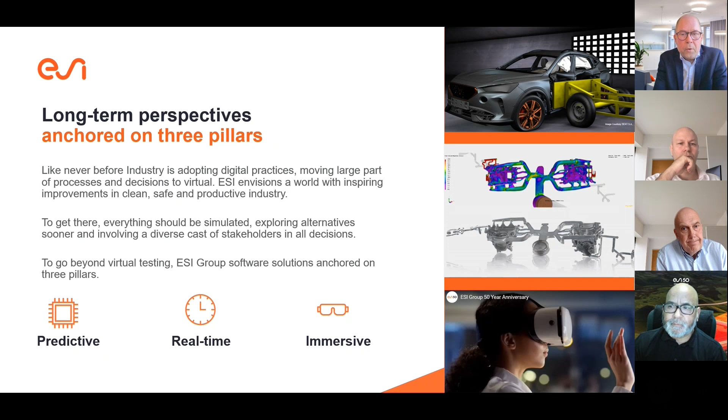And we are also engaged in smart manufacturing. So what you see here also on the picture is casting simulation, where we, for example, are working on mega casting projects in the automotive industry. So supporting product performance, smart manufacturing, and what we will talk today about, human, product and process-centric validations, is key for us. Next slide, Eric.

And also to connect a little bit to why we are here today. Together with PTC, we are supporting Volvo Trucks. And we will also be present at LiveWorx to talk about this a little bit more. But this is an example how we are together enabling Volvo to actually experience the virtual data in a much better way and doing global collaboration to reach a clean, safe, and productive environment.

So with that, I hand over to Eric, and myself, Jonas Fredriksson, I'm running the EMEA customer engagement organization. All right, thank you for that lead in and that introduction, Jonas. As Jonas said, my name is Eric Kam, and I am a product marketing manager for ESI Group, for what we call our human-centric process validation tool.

And that brings us to today's topic of unpacking or decompiling what I mean when I'm saying human-centric assembly. And what does it mean to weave a digital thread through that validation of human-centric assembly processes?

And really what we want to do is we want to provide people with the necessary tools and the necessary insights that they need so they can have certainty that any new product that they are bringing to market, that they're in the middle of engineering, that you are kicking off its product life cycle, you want to have some certainty that people can safely and efficiently use those products, operate them, that they can build them, that they can assemble them, and that they're able to service and maintain those novel products.

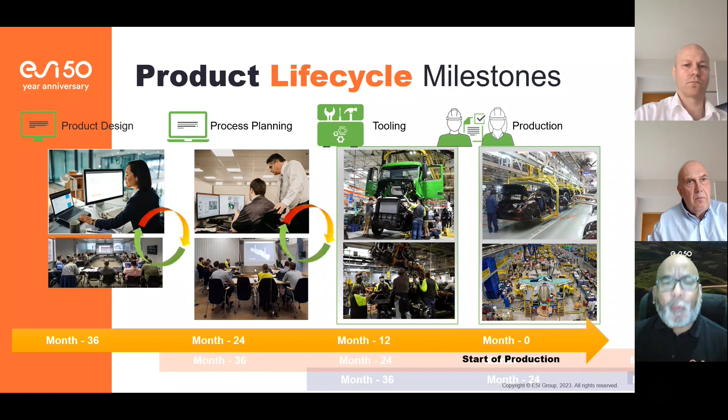And one of the challenges that we've seen and what we're trying to help you guys out in industry address is to partner with companies like PTC so that we can help you stitch back together and reweave any of those potential breaks in your digital thread.

Now, to further elaborate on why that sometimes happens, let's first consider, when do we identify these issues? How do we identify them? And when is the earliest opportunity, once we find them, that we can resolve them or fix them? So again, I'm representing that timeline going across this chart on the left-hand side of the slide from left to right. We're in engineering, and every engineering program, hopefully, kicks off with a list of, this is what we found and this is what we learned the last time we engineered this part. Let's make sure we avoid those issues again.

So they'll start off every engineering program with a list of frequently challenged issues, frequent problems that they had, and they'll try to resolve those as part of their due diligence of doing their product engineering. Hopefully, before they release that product design for process planning, they've resolved a majority of those issues and reached a steady state of, let's call it, no visible or no unanticipated issues.

Then, as they start doing process planning, and maybe they're using computer simulation, maybe they're using their digital mock-up tools, new risks emerge. And again, part of that whole process of doing the tooling planning and the manufacturing planning is finding issues and then resolving them through design. And then at some point we reach data freeze, we froze the data and we start standing those tools up physically. And then we start encountering more risks or issues that we found.

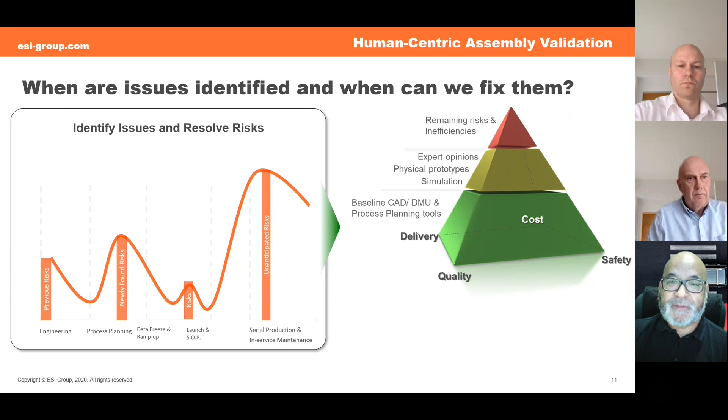And so quite often the first time that people can start interacting with a product and participating with it in a process is once those tools are physically available in the assembly line or in the manufacturing environment. And that means we've left a lot of remaining risk unanticipated, unaddressed and unmitigated until quite late in that process. When we talk about human-centric process validation, what we're talking about is trying to create new opportunities so that humans can experience that product in the context of those human performed operations.

So in the lower right-hand part of the screen, you can see an image of two people in virtual reality doing an ergonomics review of the installation of a plug-in electric hybrid. That happens to be a Volkswagen Passat plug-in electric hybrid. And this team of manufacturing personnel, represented by those ergonomics mannequins, is trying to validate the placement of that battery. And by doing this in VR, they could quite possibly be performing this check much, much earlier than we normally would have people experience those physical processes.

By introducing the use of virtual reality or extended reality technology, we're providing the opportunity for people to effectively travel in time and teleport themselves into that production environment, a manufacturing line that has yet to even be commissioned. And they can start identifying and resolving those human factors or human-centric issues in their designs. That way, we can really participate in the manufacturing processes before we finalize the product data and release it for process planning.

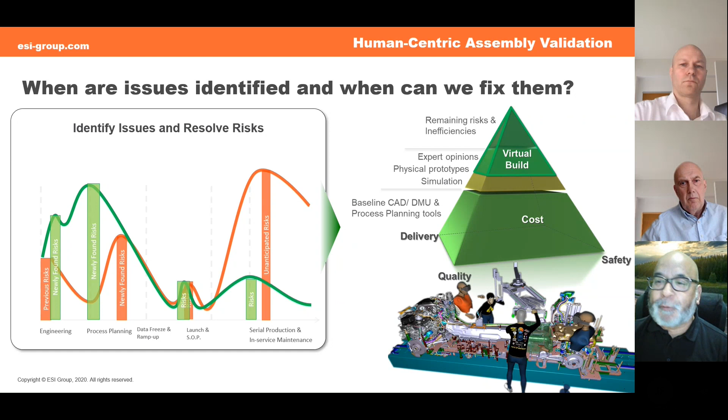We can identify how people will participate in and experience that manufacturing process before we finalize it and realize it in hard tooling. And that's going to allow us to use this virtual build, this virtual reality human-centric process validation, to really address that normally unaddressed risk that we would have to wait until serial production to arrive at. So that's what we mean when we say human-centric process validation.

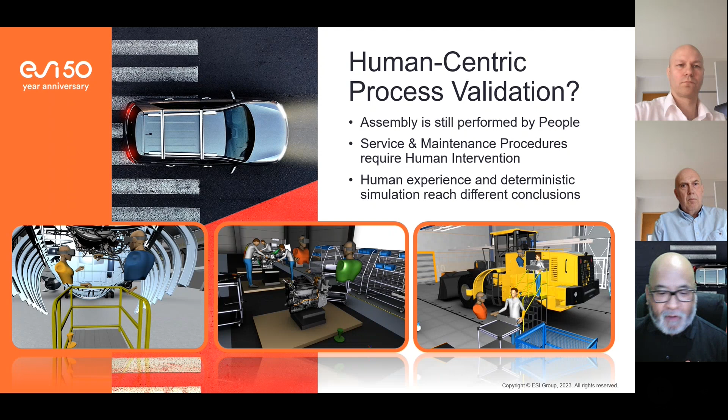Regardless of which technology we're talking about, there's still a ton of manufacturing operations and assembly that is still performed by people. Also, don't forget service and maintenance processes also require human intervention. The experience an individual has while performing any one of these operations on screen, whether it's me servicing an APU of a fixed-wing commercial aircraft, doing a subassembly of a plug-in hybrid power plant for an upcoming vehicle program, or placing batteries in the back of an electric wheel loader, leads to very different conclusions than what we could normally determine with deterministic simulation or some kind of simulated animation of a manufacturing process.

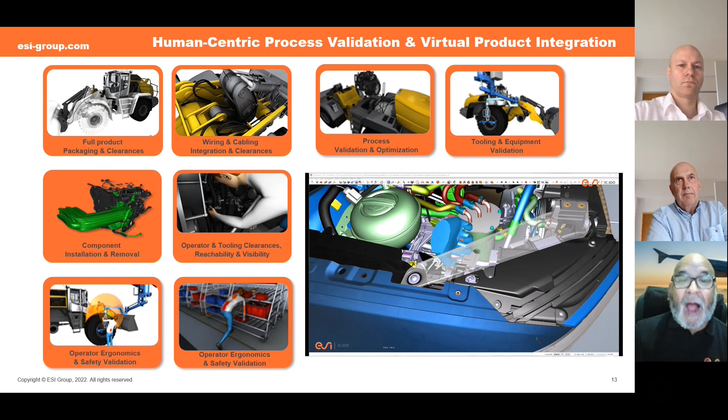And in that little animated sequence, if I did find that the cable was too short, then in the simulation I could also engineer a longer cable and validate if that cable works. Now what's happening on screen is I'm seeing, does the operator have the necessary clearance to grab that cable and unplug it if it's already plugged in?

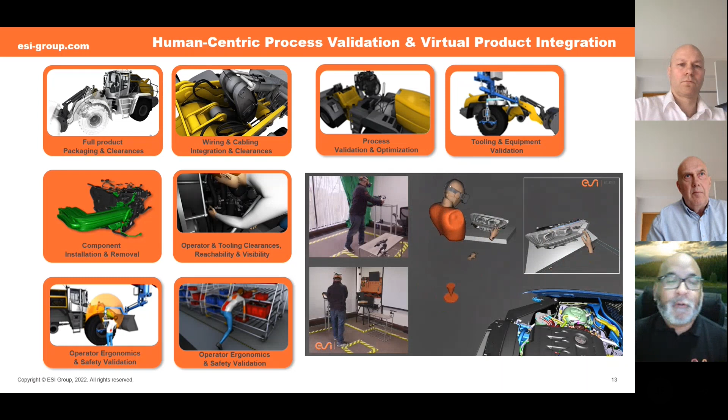Another thing that we might want to validate is using this virtual reality to validate how humans participate in assembly. On screen right now is a colleague of mine, Meredith, and she's holding in her hand a physical headlamp from the previous model year. And we have that headlamp mounted with a virtual reality tracker, one of those things that we can get from Steam to accessorize my Vive or my Valve Index. And in this case, I'm doing a tracked simulation of me holding a physical headlamp so that I have a real weight in my hand and trying to mount that.

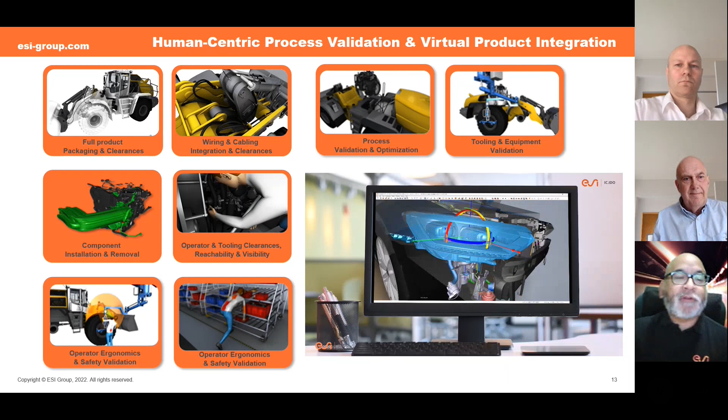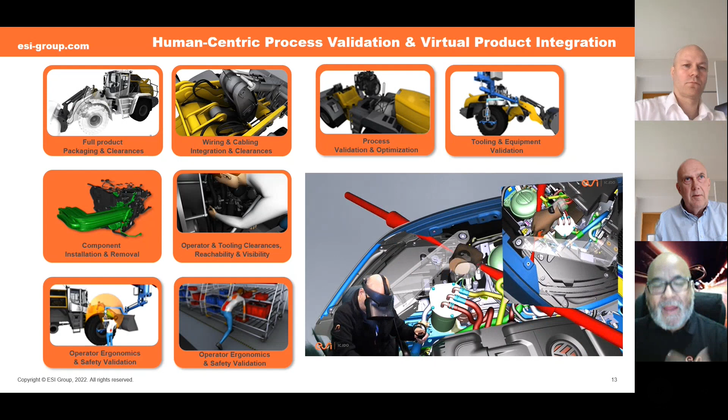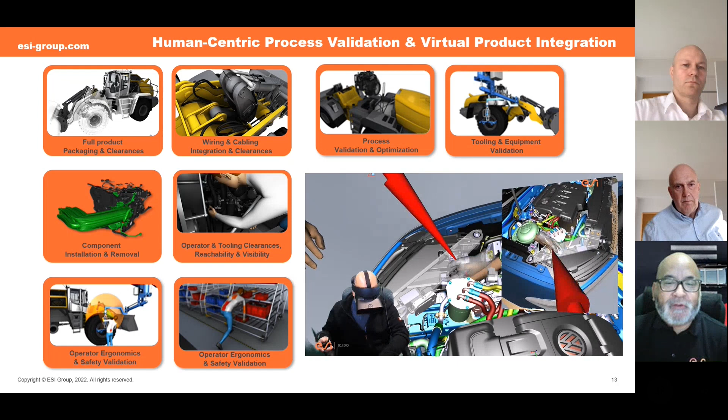So what we're able to do when we do this human-centric process validation is we provide for people an environment where they can validate things like product packaging and clearances, but in a much more dynamic and a much more immersive way than we would normally do if we were just using digital mock-ups and doing on-screen puppet shows. And so by making me involved or immersed in that operation of mounting the headlight, of trying to plug in that headlight, I am now an input. Me, the human being, is an input into that simulation and the decisions that I make as a result.

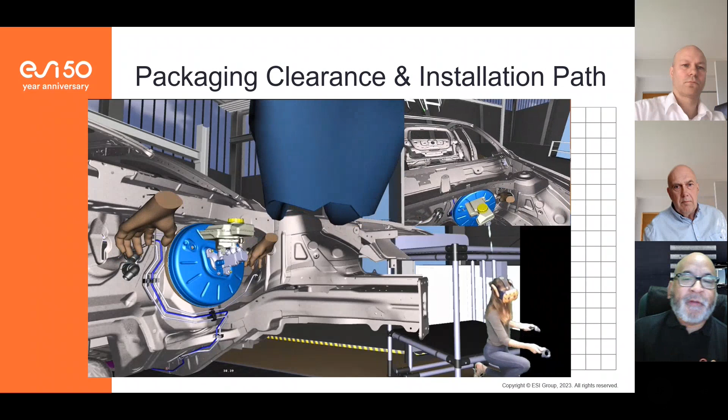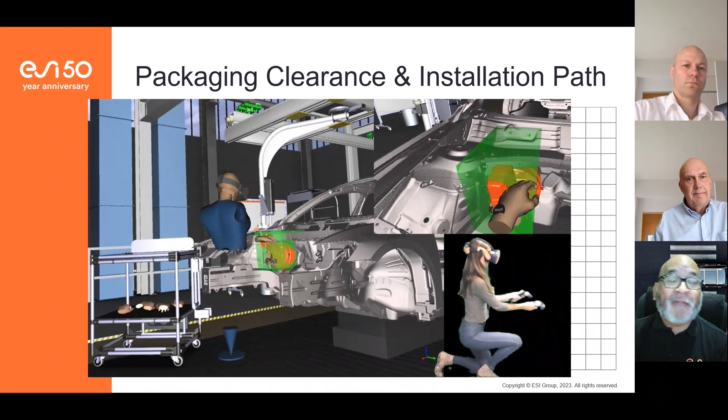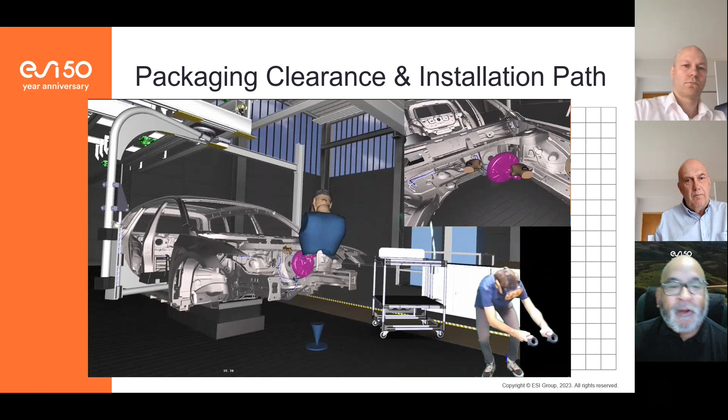So again, on screen, we just have another view, just a different part of that same vehicle that we had on screen just a moment ago. In this case, I have a variant. I have a left-hand drive and a right-hand drive variant of the same vehicle. And on screen right now, I just have a team of different stakeholders from my enterprise who are all taking turns just making sure how difficult is it to mount. That's the power brake booster for power brakes in the car. And I'm just making sure that if I'm mounting that in the left-hand drive vehicle, will it mount just as easily in the right-hand drive?

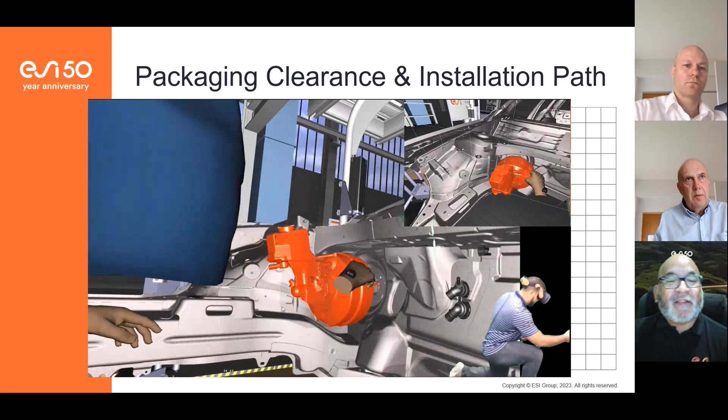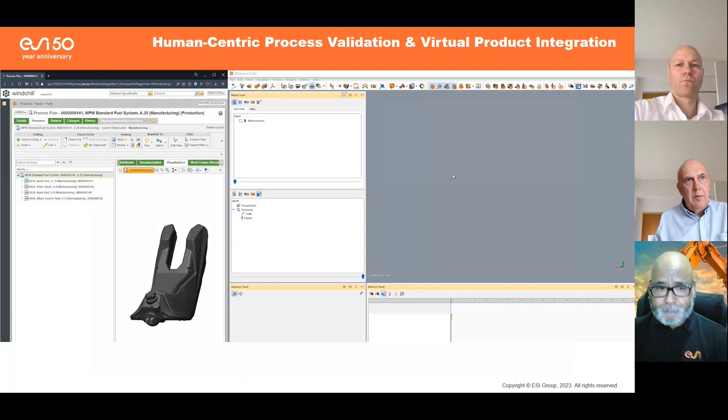And we did make many discoveries that it is more difficult to assemble the right-hand drive car in regards to this brake booster. And it would increase that manufacturing lead time and slow down the takt time. So whenever we use these virtual reality experiences to validate manufacturing processes, some of you might ask, well, how did we capture that data, right? Where did that product data come from?

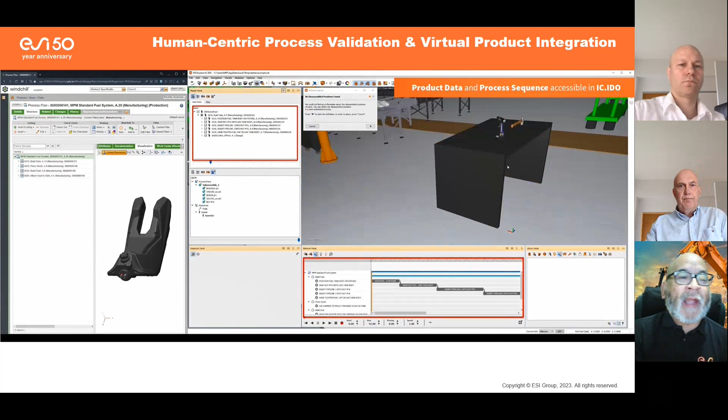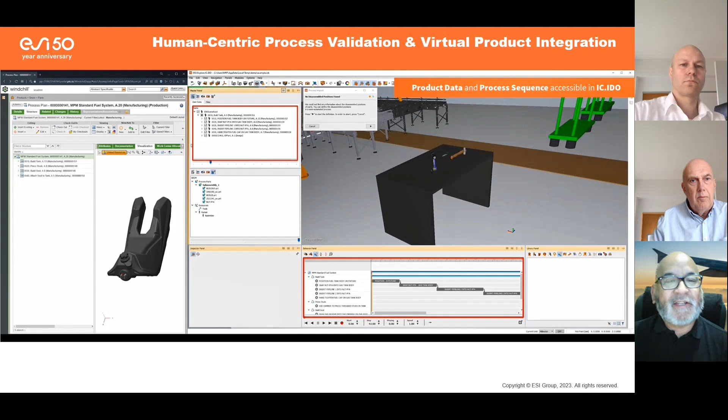So what's happening on screen right now is the outcome of a couple of years of collaboration between ESI Group and PTC to integrate the Windchill PLM and MPM environment and integrate a data path into IC.IDO. So first of all, I'm going to back the video up just a little bit to go right back to the beginning, because this is important. Here we're taking product data that we've highlighted in the Windchill environment, and we pushed that data into IC.IDO. And in doing so, I have effectively traveled almost a year or maybe 2 years forward in time to when that geometry of the product and the manufacturing environment would in fact be realized in the physical world.

And on screen right now, I'm just taking that digital representation of the production process, and I'm just mapping that to overlay with what I know the physical environment of that plant's going to look like. You can see on the bottom of the screen, we have that little Gantt chart going across showing the process order or the procedural timeline. And we're trying to capture, is this an appropriate way to transfer that part from its staging area where it arrives from logistics to how it goes on the line?

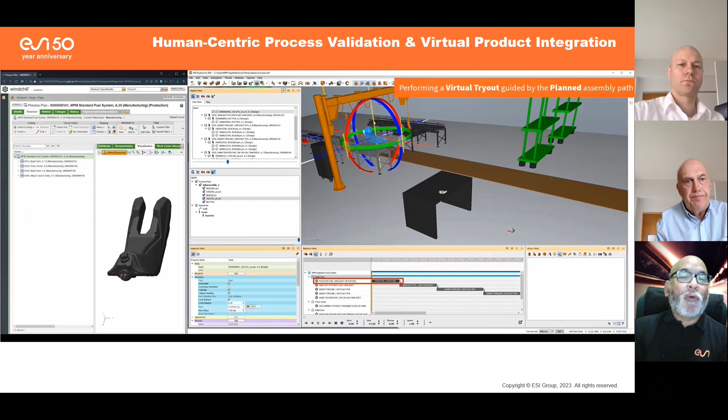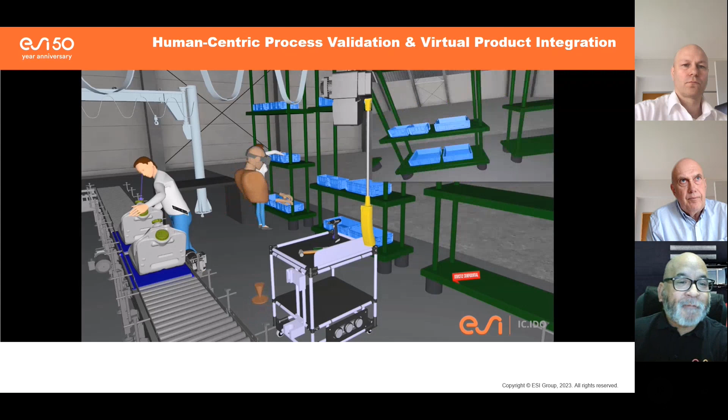And maybe in this case, we know it in fact is not going to just travel in a straight line, but it's going to march 90 degrees perpendicular to that production line and then walk along that production line for some distance. And now that we've seen that on-screen puppeteering of validation, is that a reasonable process? Now one of my colleagues was able to put on his head-mounted display, or his HMD as we call it, and enter into that manufacturing environment and experience it for themselves. And so on screen you'll see a little grayscale version of one of those components kind of flying across the manufacturing environment.

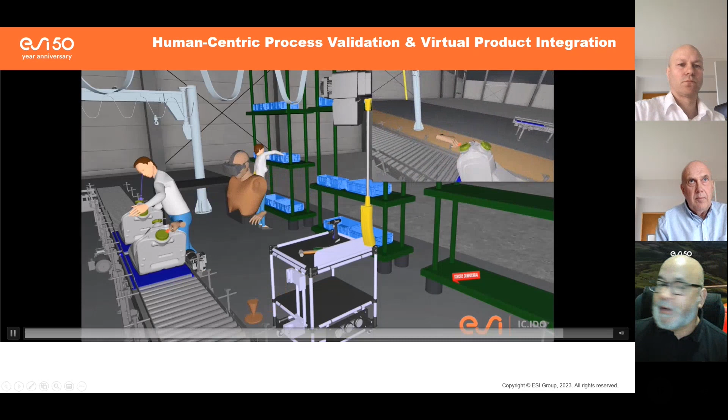And then my colleague walks over there after seeing that teleport from one point to the other, and then he goes over and picks up the actual part, has to physically, virtually carry it in his hands, and walks over to the line and mounts it to the rest of that subassembly.

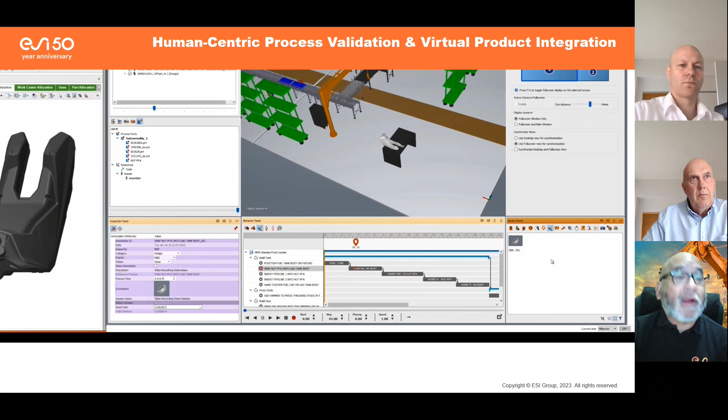And in doing so, he might recognize that the process was well planned or well defined or not. So if he did observe something that would require an engineering change, he's now added a process annotation, and he's quickly typing in on the screen. Don't worry about it, this is not an eye test, but we're capturing relevant data about what we saw in, let's call it, a manufacturing validation of that mock-up of the assembly line. But what's important now is that he's captured that data digitally.

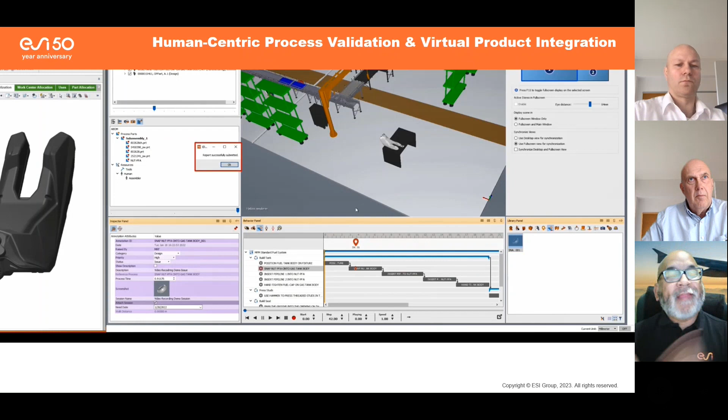And now that it's captured, we can submit that as a report, and that becomes part of the digital thread that gets transferred back into your Windchill PLM and MPM environment. And that way, we can reconnect what I said was that slight severing of the digital thread that often happens when we go from process planning to tooling realization.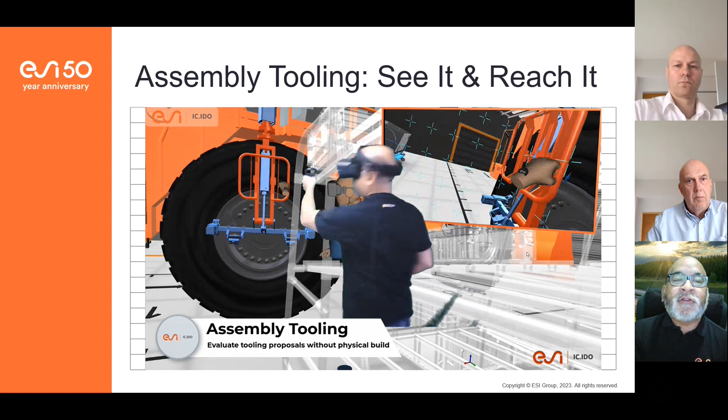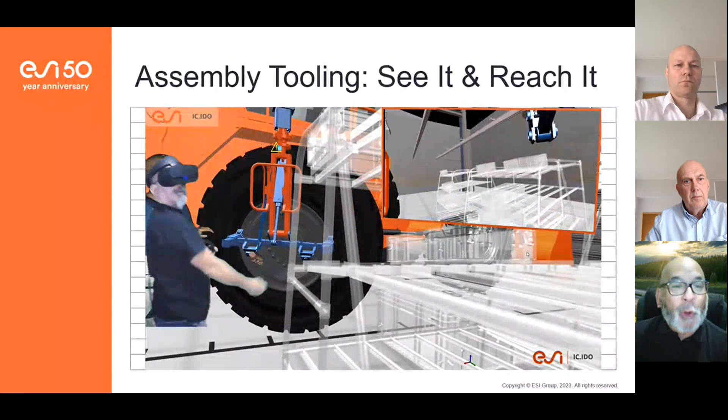So there's quite a range of things that we can do in this virtual environment to provide you with opportunities to do things like validate this tooling. So in this case, I have an assist tool that's helping me pick up and lower a big tire for a large earth mover, a large wheel loader.

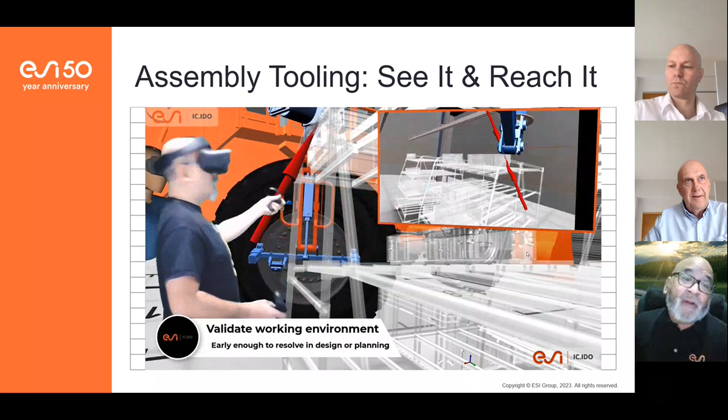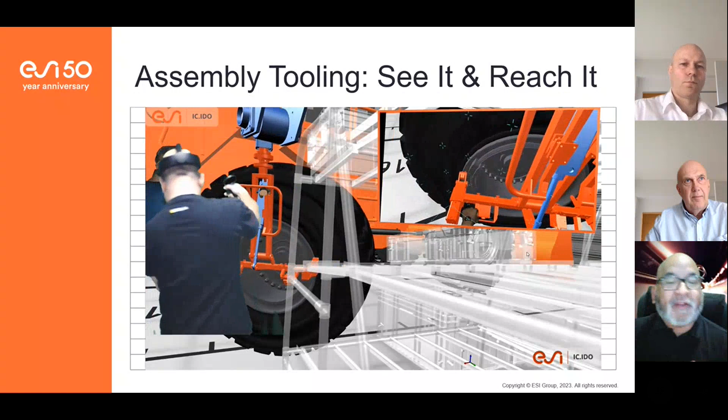And I'm validating, can I see where the tire gets mounted when I'm operating that? Because if I can't, maybe I have to re-engineer the tool. I have to make sure that this tool's not going to bump into my coworkers, not going to bump into the logistics racks, and is able to be an effective contributor to the manufacturing process.

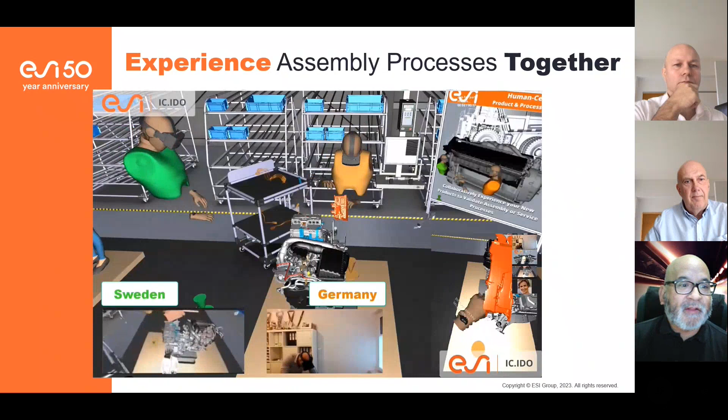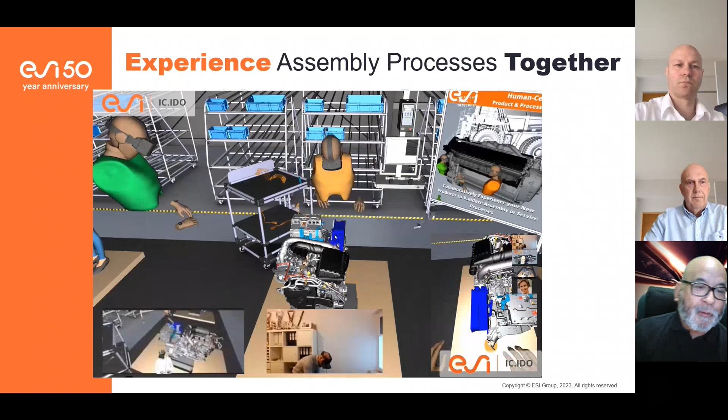Another thing that's very important about what's possible in this human-centric validation is that if I'm already time traveling, I might as well spatially travel too. So on screen right now is a quick animation that I'm showing you, and I'm sorry for the bit rot of this video. It's a little bit choppy, but in that video, what's going on is that we had a

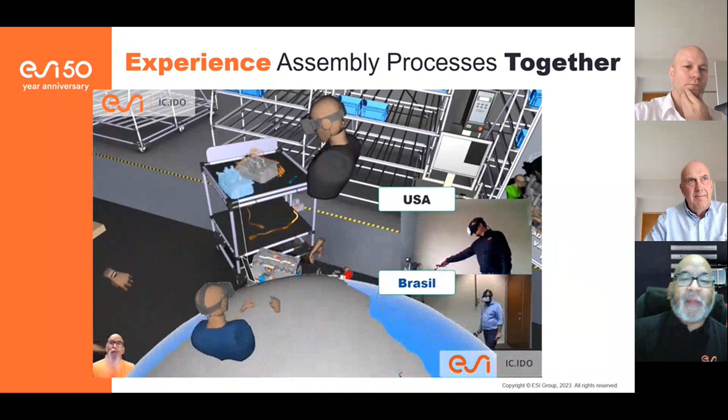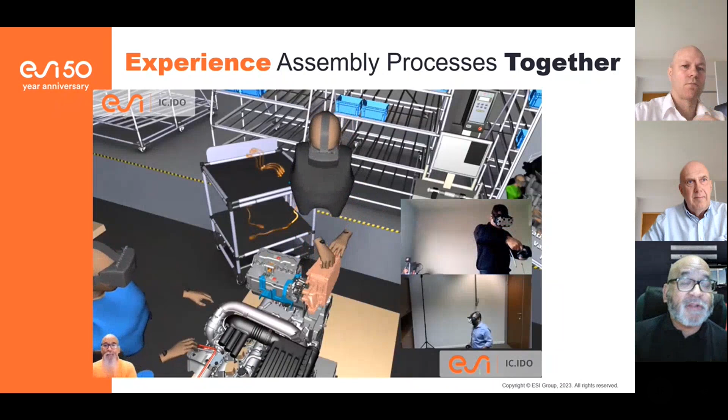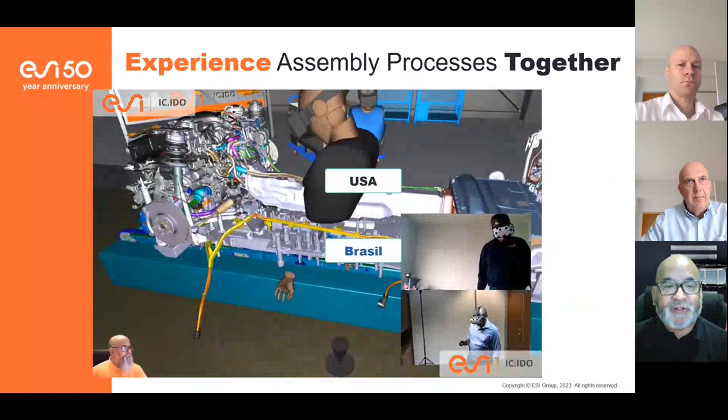collaborative session that pulled together our team from the US with our team down in Brazil. And the two of them, even though they're in separate countries, completely different hemispheres, different continents, are virtually standing in that same manufacturing plant together. And they're able to make experience-based decisions about, is this a plausible, acceptable process to me?

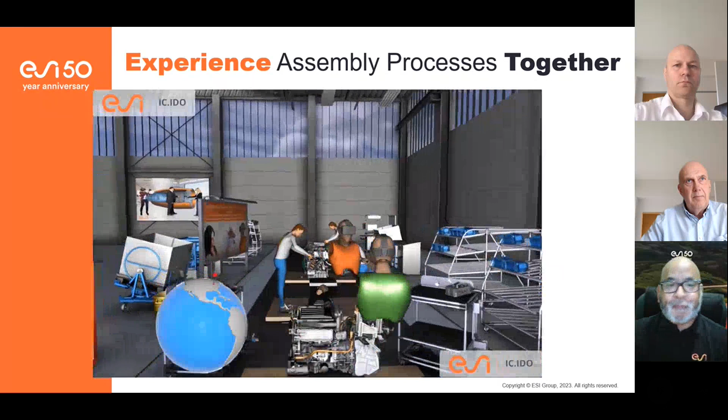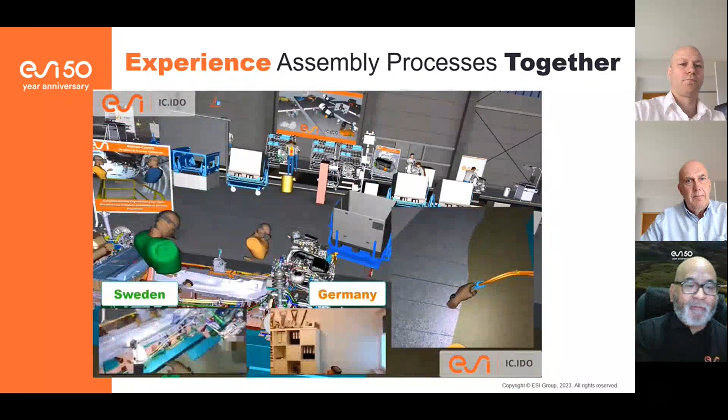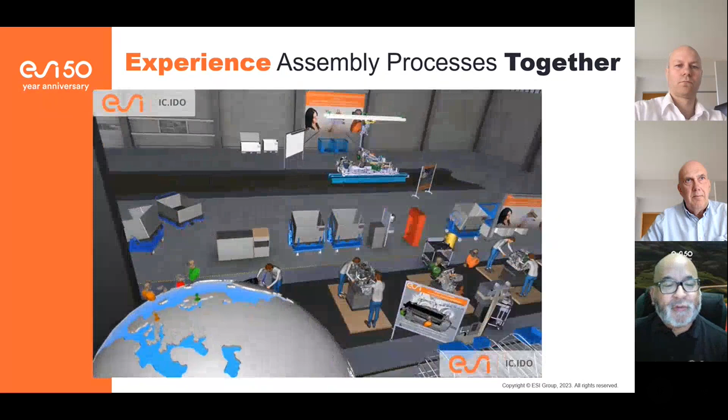Again, there's my colleagues from USA and Brazil trying to do the wiring of this plug-in electric hybrid. And then I'll have my colleagues from Sweden and Germany try to do the same thing. And this way we can involve so many more stakeholders in that human experience that they will be able to identify a lot of those manufacturability issues that normally would not be visible or even apparent to me until physical production.

And that video is just refusing to run, so I'm just going to skip that one.